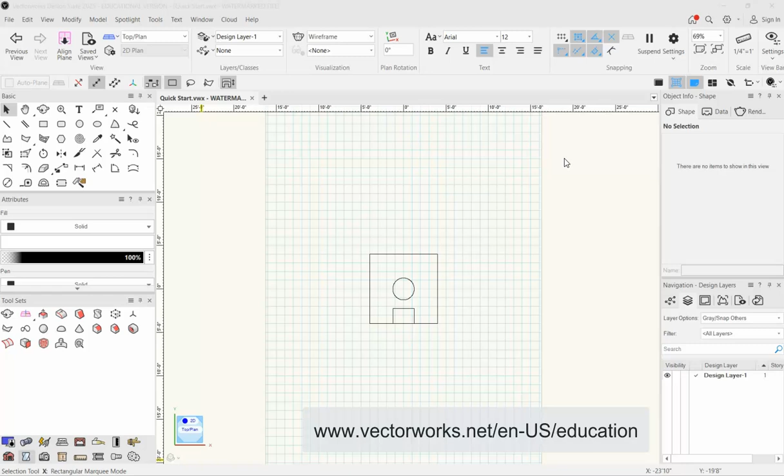Vectorworks is a really wonderful program. If you're a student, if you're an aspiring designer, I highly recommend you go out and get it. They have a free educational license for students at Vectorworks, so go out, give it a try. It's really becoming an industry standard, and it would benefit you to understand this program or to at least have a working knowledge of how to get around in this digital space.

This video today is a little bit drier than some of the others, but hopefully it'll set a good baseline vocabulary for you, and hopefully it's a video that you can come back to whenever you get lost.

Vectorworks has all the tools that you need and then some. It's highly customizable, but sometimes it's hard to know where to look or even what to look for. Probably the quickest way to learn Vectorworks is to jump in and just start making stuff, so we'll want to get to that pretty quickly. While you're watching this, I hope you'll have the program open so you can pause and try stuff, mess things up, and bounce back and forth. So with all that out of the way, here we go.

This is your basic Vectorworks workspace. The layout is pretty similar to a lot of other programs. Across the top here you have your menu. Under File, you have things where you can open files, set document preferences, things like that. Edit has a lot of familiar things such as copy, paste, undo, redo, all the basic stuff you'd expect to find in there.

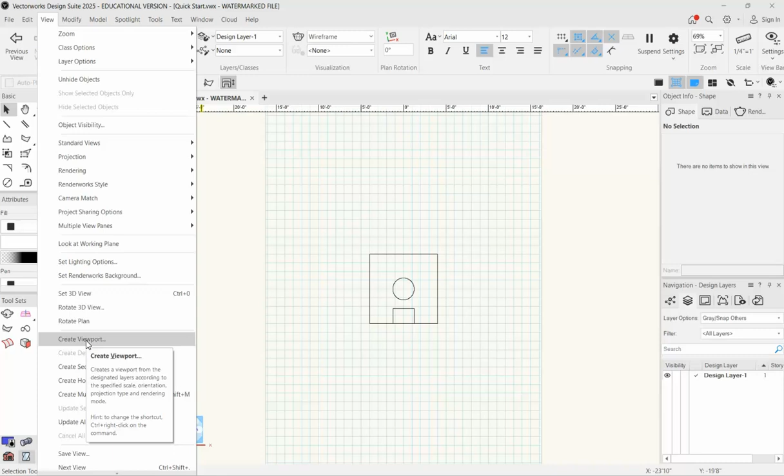View. This is where we start to get a little more specific to Vectorworks. We have a lot of different options in here having to do with rendering, projection, viewports, a lot of really specific stuff. Basically, any way you want to look at your drawings, you'll find options for that here under View.

Modify is the next tab. Modify gives you a lot of options for generally playing with two-dimensional shapes. Model is sort of the counterpart, and that deals a lot more with 3D shapes. So Modify I generally use for 2D manipulation and Model for 3D.

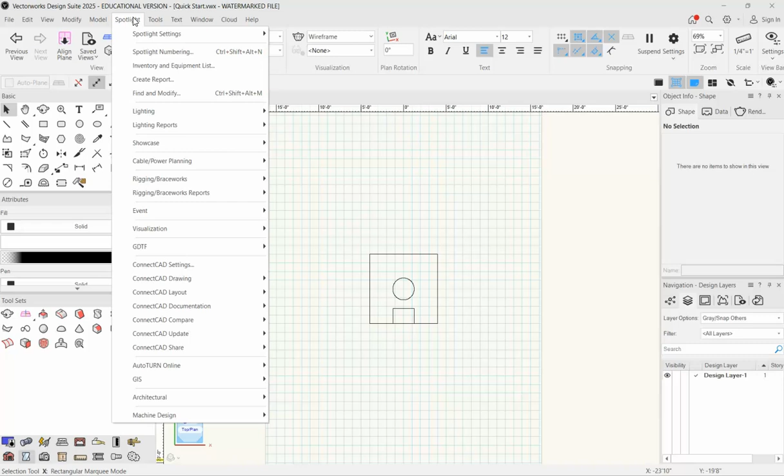Spotlight. This is where we'll get into a lot of the industry, entertainment specific stuff, a lot of the lighting and things like that. If you're a design student, you should have the Spotlight edition of Vectorworks. If not, I will show you how to fix that in just a sec.

So Tools is the next tab. There's not a ton in here that I really deal with, but you can find certain preferences at the bottom, which you may want to come back to.

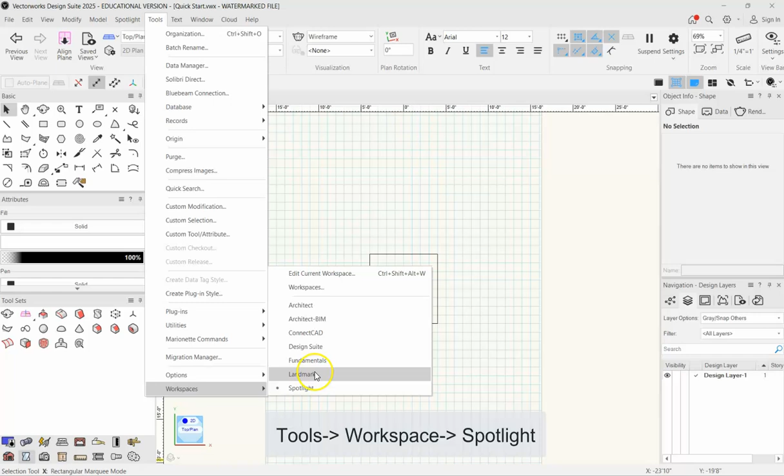So if you don't have Spotlight, like I just mentioned, come on down here to Workspaces. Down here you can pick Architect, Design Suite, Fundamentals, Landmark. You want to be on Spotlight, if we're talking about theatrical design at this point.

Text. You can write things in Vectorworks and you can manipulate that text. You can turn it into three-dimensional shapes and things like that.

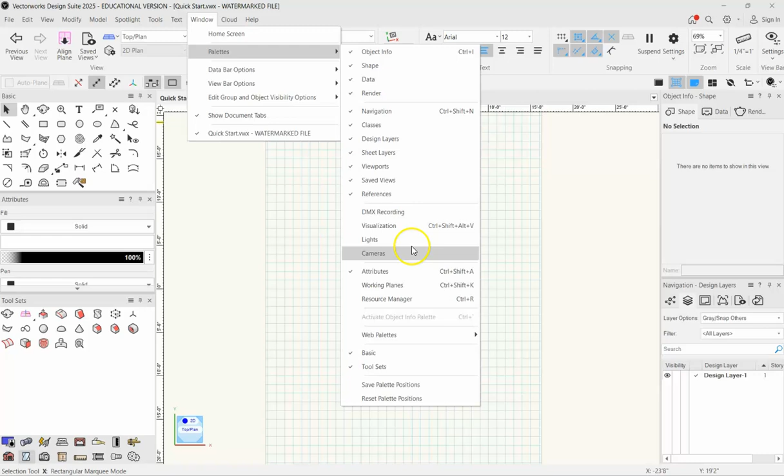We'll go over that. Here in Window, I don't get into this too much other than the one you probably want to know, which is Palettes. Palettes is where you can find all of your different tools and tool sets that you're going to want to be using. If you're seeing something on my screen and it's not on yours, maybe it looks different over here to you, that's probably just a palette setup kind of thing, and that can be addressed over here under Window, Palettes, and then you can select whatever it is that you're not seeing.

In fact, let's take a quick side quest and talk about layout and palettes. As you'll see, we have all these different little palettes that we can undock. We can have them floating. We can pull them over here. We can redock them, whatever it may be.

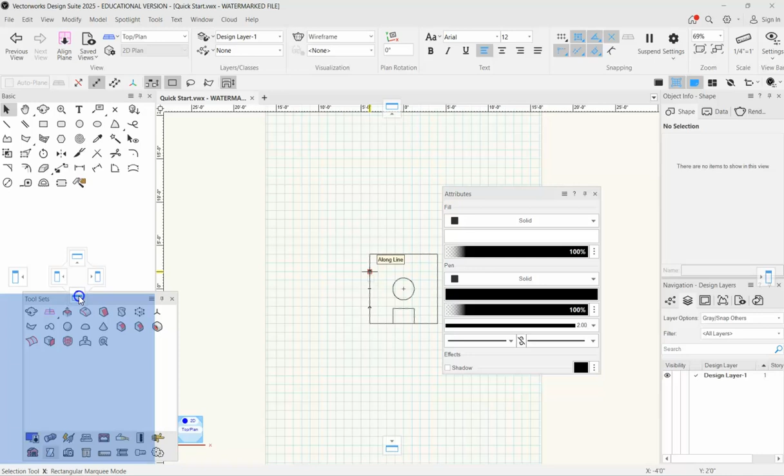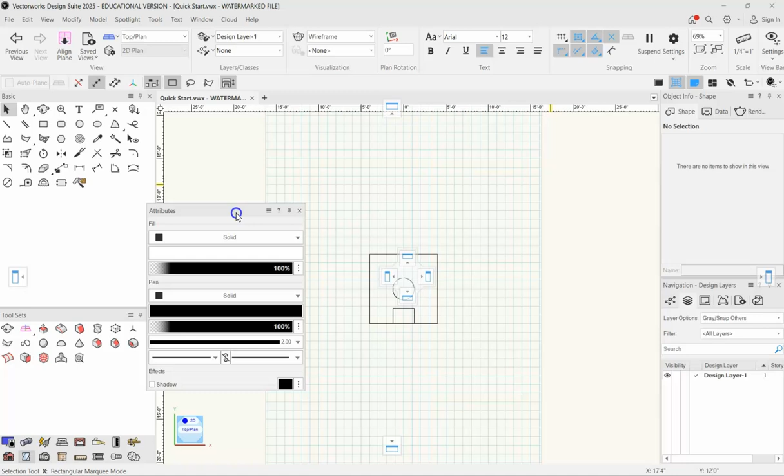Say you accidentally close one out. Now all of a sudden my attributes are gone. How do I get that back? It's as easy as coming up to Window, Palettes, and it was Attributes that I had accidentally closed, so I'll do that. And here we have Attributes right back. I can drag it over here, you'll see it'll bring up this little thing, and I can do that. Same thing too, you can adjust the sizes depending on what works for your workflow.

How much of the tool sets do you think you need to see, and what gives you enough room in the field here to be doing a lot of the work.

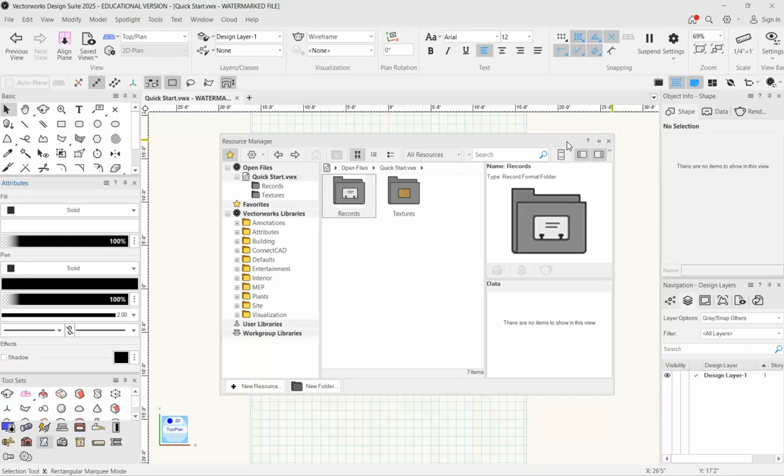When you first start up Vectorworks, you're probably going to see Resource Manager floating somewhere near the top, and every time you hover over it, it pops down and bothers you. At this point, just learning how to use the program, you don't need this, so just close it out. When we do need it, we can come up to Window, Palettes, and turn it back on.

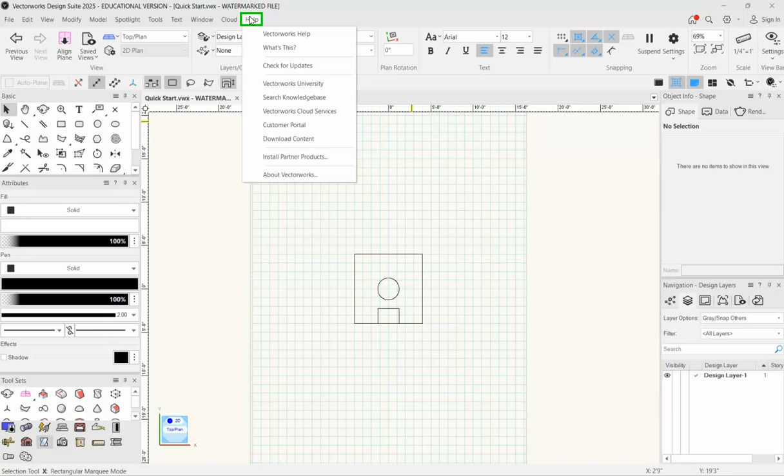So that's Window for you. After that we have Cloud—I'm not going to mess with that too much today. That gets into sharing documents and things like that. And then, of course, Help if you're having issues. They have a nice library, and a lot of videos at Vectorworks University where you can hop on, ask questions, and get some info there. So that is your basic menu across the top.

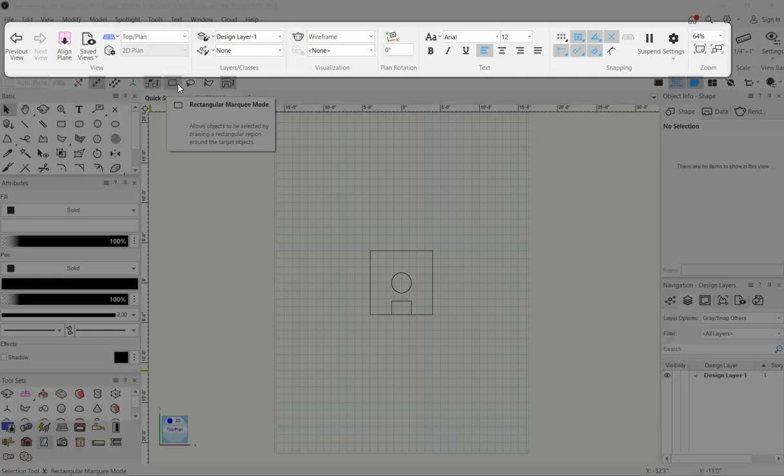Directly below your menu we have our View bar. It has a ton of extra things on it outside of strictly views, but in general this area will tell you how you're looking at the project and what you're working on. Here in the view portion, you'll see different views. Right now we're looking in top plan view, which means we're looking down at this as if it were a piece of paper, but we can switch to something like an isometric view.

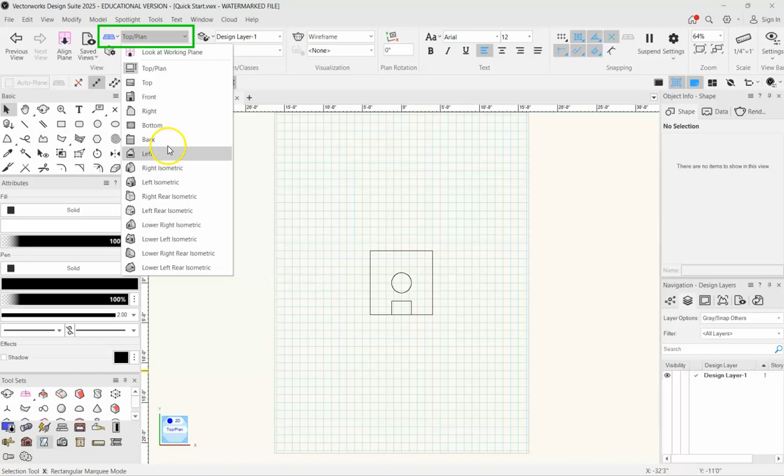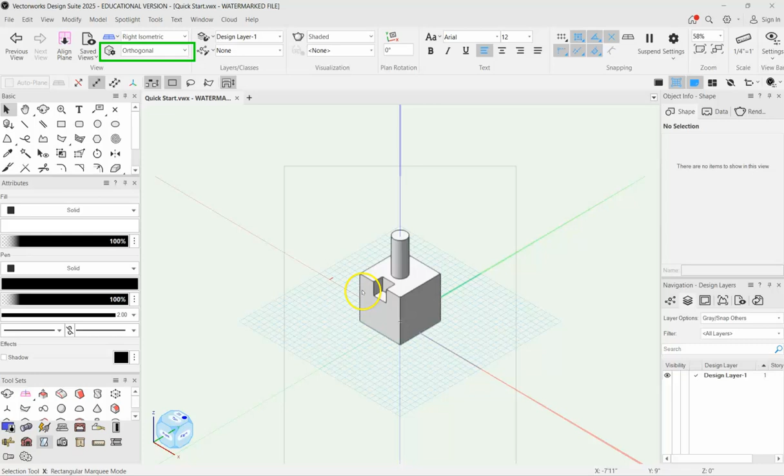And we can flip through our different views right over here. Underneath that, if we are in a 3D view such as an isometric, we have our projection, which can be perspective or orthogonal. So again, this is just a different way to gauge how you're going to be viewing it. They also have a couple different options in there.

So that's view. Right next to that we have layers and classes. Similar to Photoshop or a lot of other programs, we work in layers here so you can stack things up. But in Vectorworks we also work in sheets and classes. There's another video in this series that deals exclusively with classes and layers and all that stuff, but for now you just need to know that this is an area where you can select which class you are creating and what layer you are drawing it on.

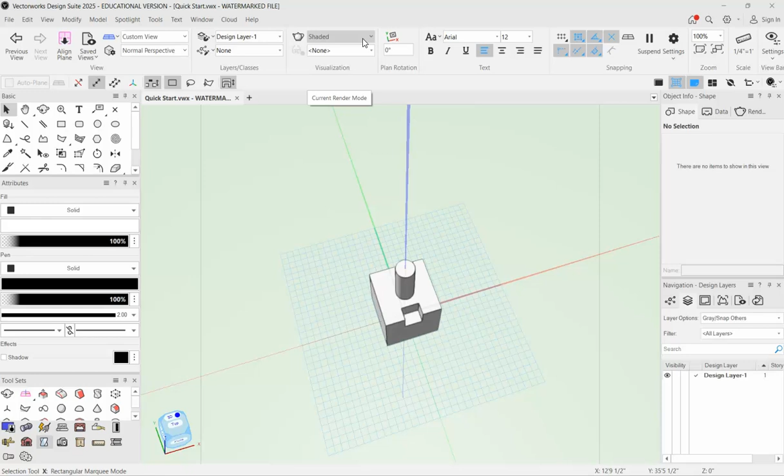Next to that we have visualization. So again, visualization is just how we are rendering our images as we are drafting. Right now it's in shaded—that's sort of the default, and that's where I do pretty much all of my design. You can get to fancier renderings and things like that once you get to actually working with images and viewports and putting together your final package. But for drafting, I usually keep it in shaded.

But you can play through some of these. There's Sketch, there's Artistic Renderworks, which you can make look like pen or pencil or whatever it may be. But by and large, I usually work in shaded. It used to be called OpenGL—if you have an old version of Vectorworks, this is OpenGL.

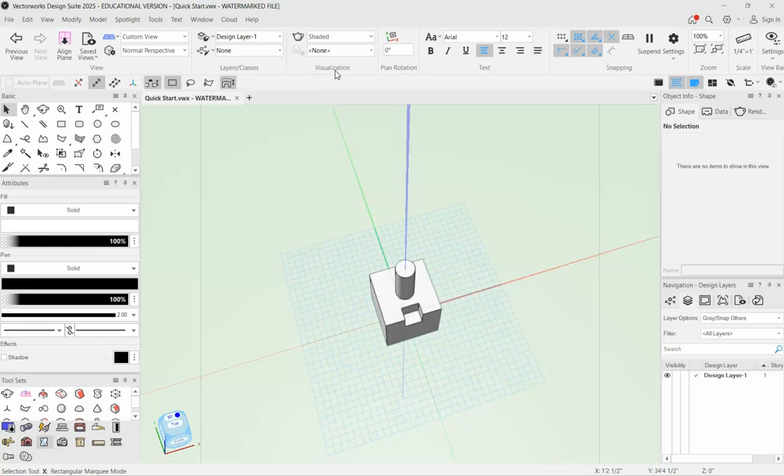Next to that, I'm going to skip plan rotation. But next to that we also have our text editor. Similar to Microsoft Word or Google Docs, you can punch up text in here using your text tool, and you can edit it—change the size, the font, etc.

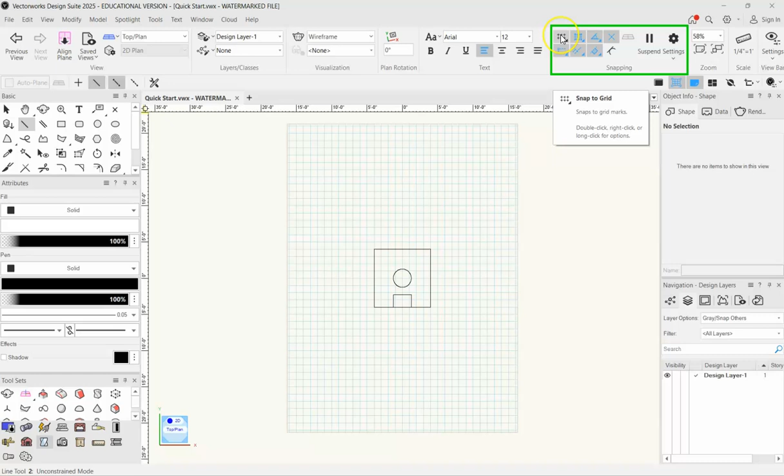And now we have snapping. Snapping is great, it will really help you with precise drawings. What that essentially does is it allows you to choose what you want to snap to—do you want to snap to a point on this grid, snap to an object, or to a specific angle? So as I am drawing something, I want it to be perfectly straight, and you'll see it will snap to that line and draw it completely horizontal.

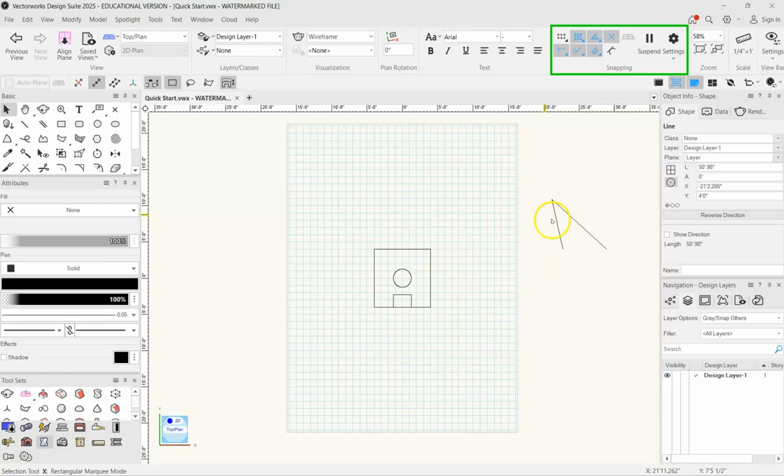It'll also snap up to 30 degrees, 45 degrees—it'll make things really precise. It'll also snap to endpoints so that you're connecting things perfectly in space. That snapping, if it ever gets in your way, it's easy just to pause it or turn it off right up here.

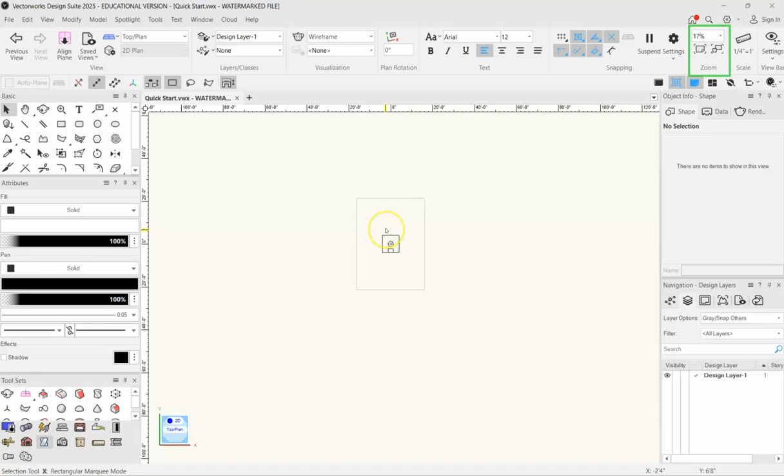Next to that we have Zoom. I don't actually use Zoom a lot—I prefer to use a mouse. If you don't have a mouse, I really suggest you get one for use with Vectorworks; it just makes life a lot easier. With your scroll wheel, you can zoom in and out really easily. Control plus your scroll wheel will move you up and down. Shift with your scroll wheel will move you left and right. So I try to avoid this too much, and I just use my mouse generally to zip around.

Anyway, there's also some stuff below that. This is your quick preferences area. You can play with different settings, but again, I don't want to get too deep in the weeds today as to what all of this various stuff does.

As you start working with Vectorworks, you'll know a little bit more about your own workflow and style and what does or doesn't suit your work. So I wouldn't worry about this too much.

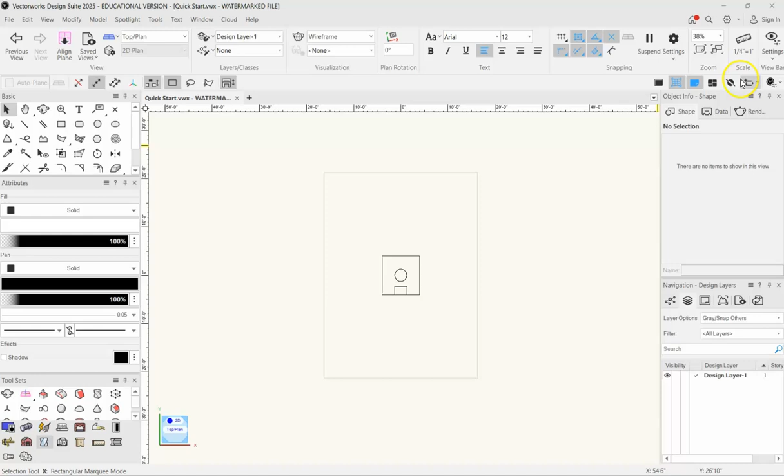But again, if you're seeing something on my screen that you're not seeing, a lot of that can be looked at up here in quick preferences. So you can turn the grid on or off. You can make the page boundaries there. You can go into dark mode. Whatever it may be, all of those little preferences are going to be over here.

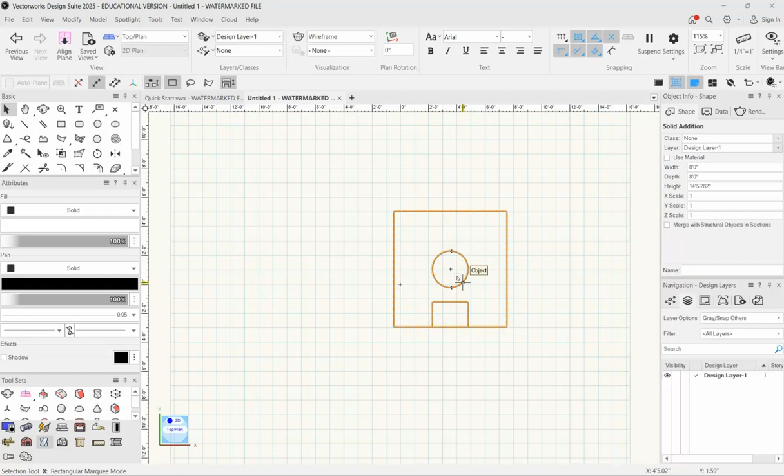Below that, you will see tabs, so you can have multiple files open, and you can flip from one file to another, and you can copy things from one file to another. And that's about it for the view bar up here.

Okay, so let's get into some of the fun stuff now. Tools. Over here on the left, you will see your basic tool palette. I'm not going to get into all the different tools. In video 3, we'll start getting into some of this and actually start drawing stuff. Just know that up here you have all your different tools.

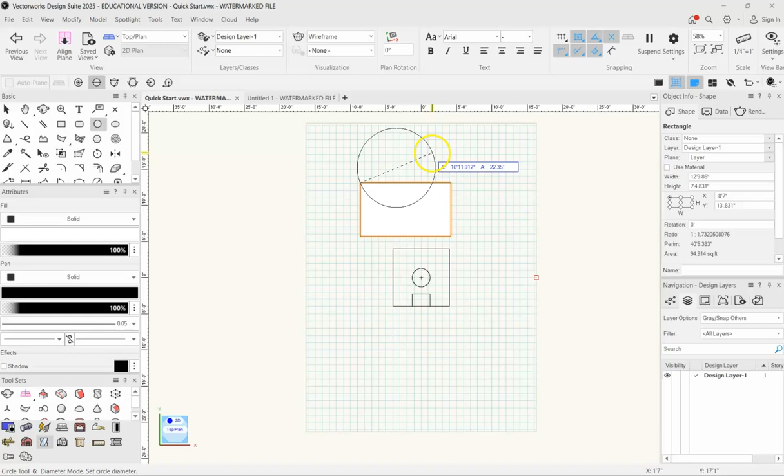For example, we have our rectangle tool. With 2 clicks, you can create a rectangle. You set one point, pull it out, set another point. Same thing, we have a circle. You can pull it out this way, and draw your circles.

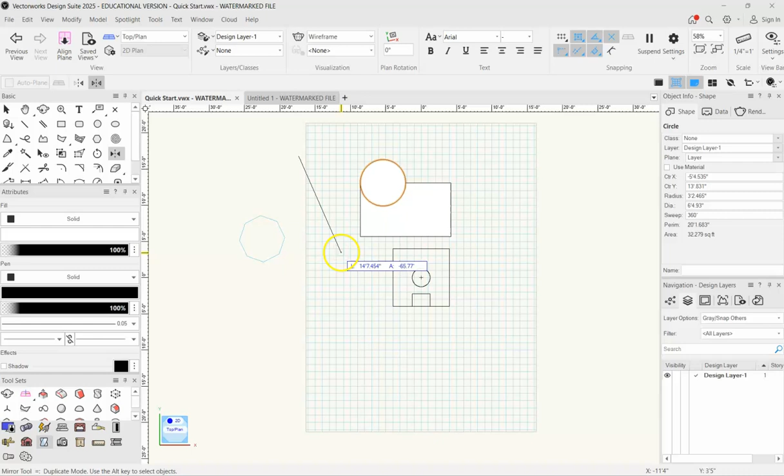Also, too, I think it's important to note that not all of these tools are simply for making shapes, but they're also for manipulating shapes. For example, we have like a mirror tool. So if you have something selected, you can go ahead and strike a line, and it will mirror that object and duplicate it.

The selection tool, right here, this little arrow, that's probably the most important one because you need to be able to select things. You can select objects with this. The tools that you're going to be using a lot, such as selection tool, I think it's worth learning the hotkeys for.

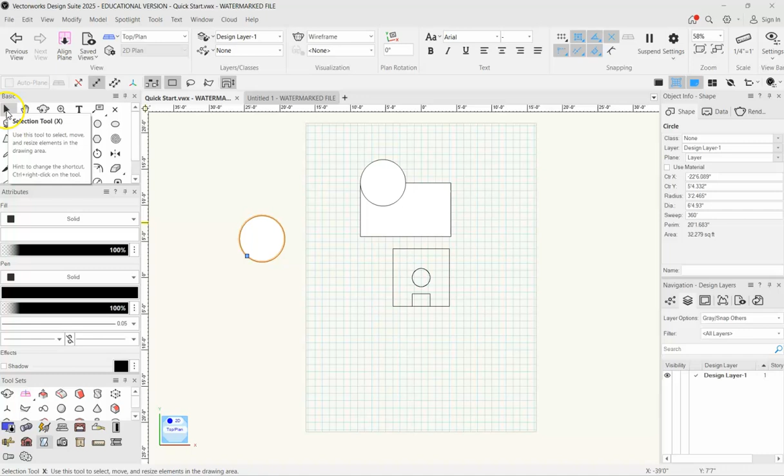As you hover over any of these tools, it'll bring up a little description of what that does, and it will also give you a hotkey. You'll see on the selection tool that is X. So say I'm in here drawing rectangles. If you want to jump real quickly, instead of bouncing all the way back over here and selecting it, as you're drawing, you can simply hit X. And now I'm in my selection tool, and I can jump right into modifying this.

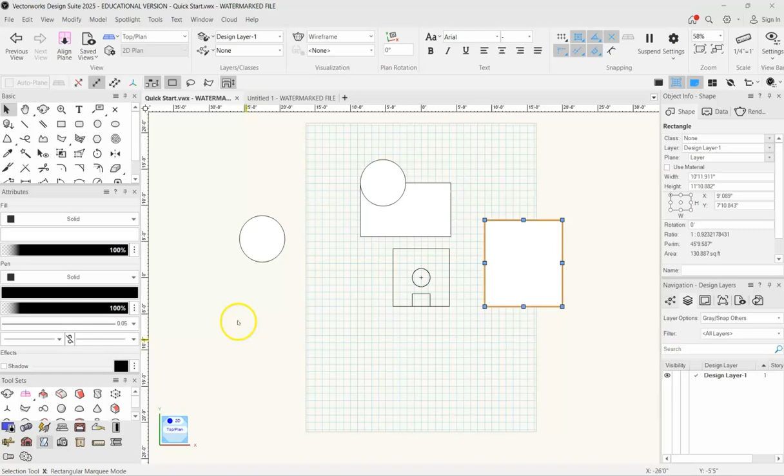I think it's also important to note that when you bring up pretty much any tool, your toolbar up here is going to show different modes. That means you can use this tool in various different ways.

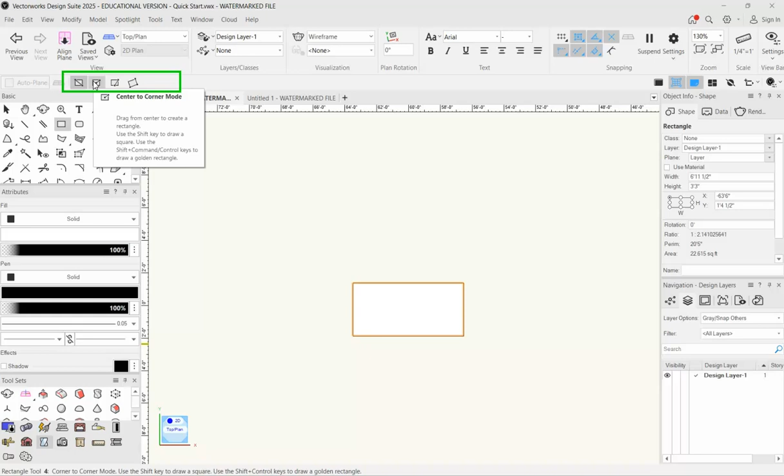So, for example, let's look at our rectangle again. Let's say I have the rectangle selected. I want to draw just like that, 2 points. So if you look up here, here are the different ways we can draw rectangles: corner to corner, center to corner, midpoint to corner, or 3-point. So with 3 points selected, I draw 1, 2, and then I can strike it up this way.

So pretty much every tool you have is going to have different modes. Again, with circle, you can strike it by the diameter. You can start with the center point and then define the radius. There are a ton of different ways to do that, but all of these tools are going to have different modes and things you can do.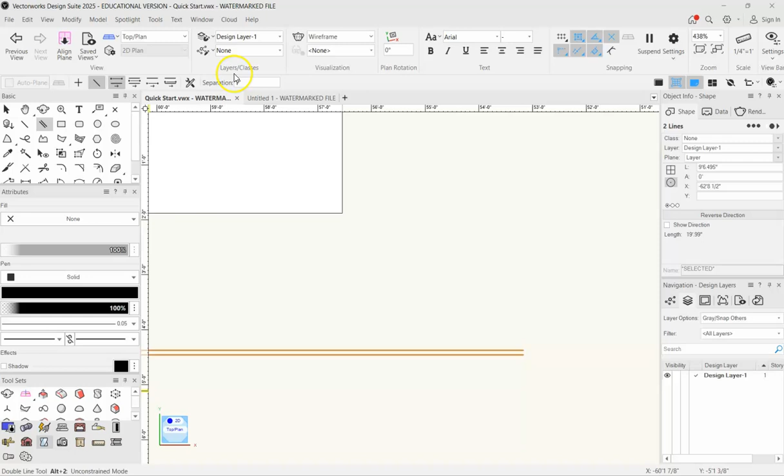Double line tool will draw 2 lines for you, like that, in parallel. But you can change how far the distance is between them. Say you want that to be 2 foot. And then the next one you draw is going to be much wider. So this is an important thing to play with. If a tool's not behaving the way you'd like it to, you can usually come up here and change the mode or play with the settings.

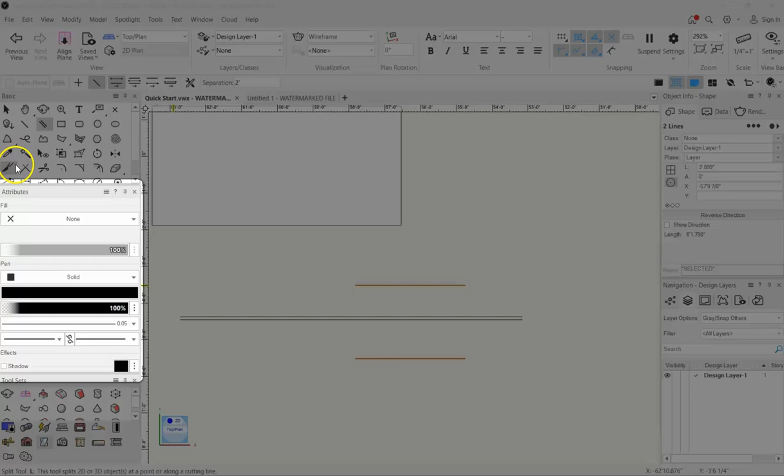Moving below that, under our basic tool set, we can start to take a look at attributes. Let me clean some of this up real quick. Selection tool. Select and delete. You can also hold Shift as you are selecting, and that will select multiple things.

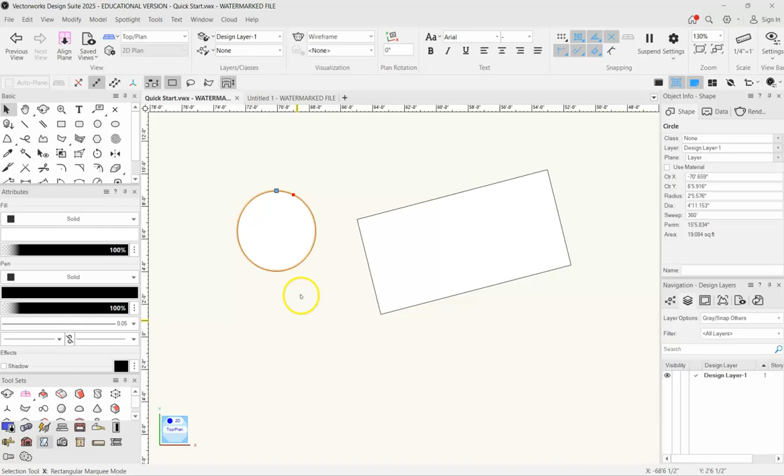Then just tap delete. So attributes. Every shape that we draw has different attributes. For example, this has a black line around a white fill. You can easily modify and make your drawings pretty specific. It gets even fancier once you get into three-dimensional modeling with textures and things like that. But this is where you can modify all of those things. So once you have something selected, you can change it.

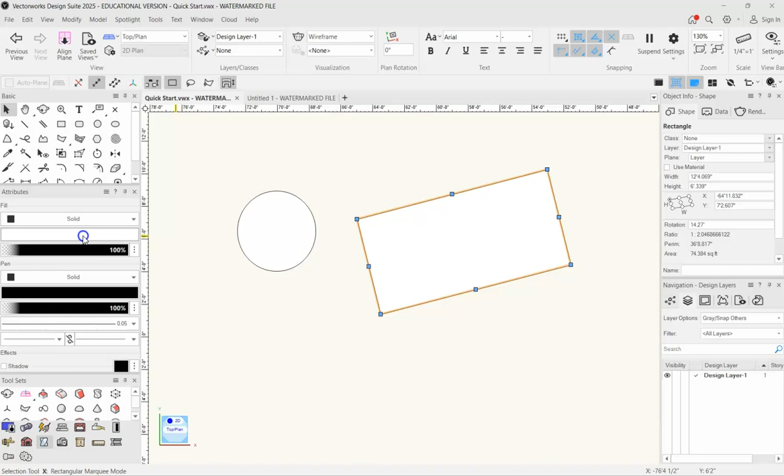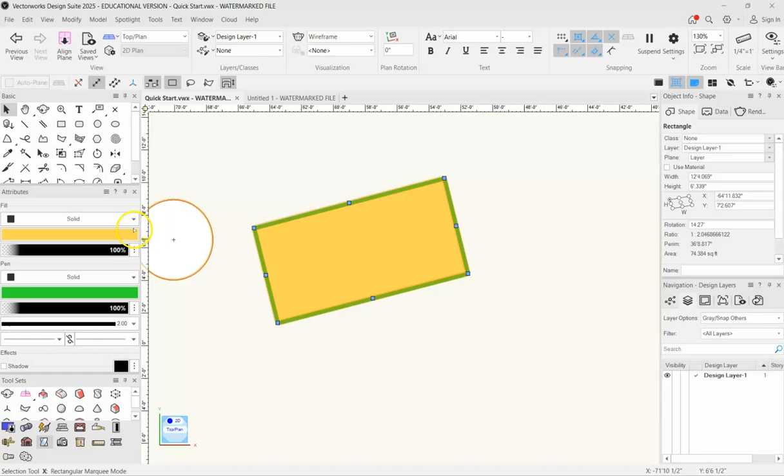Right now it's solid, but we want to change the color to orange. And the pen, the outline here, instead of being black, we want it to be a really thick green color, let's say. So we can change the color there, and we can change the line thickness as well. So you can modify things over here in the attributes. You can do dashed lines, you can do hatches, you can do gradients. All that different stuff can be found over here.

Moving below attributes, we'll see here that we have other tool sets. And you can change how much of this you are or are not seeing by dragging.

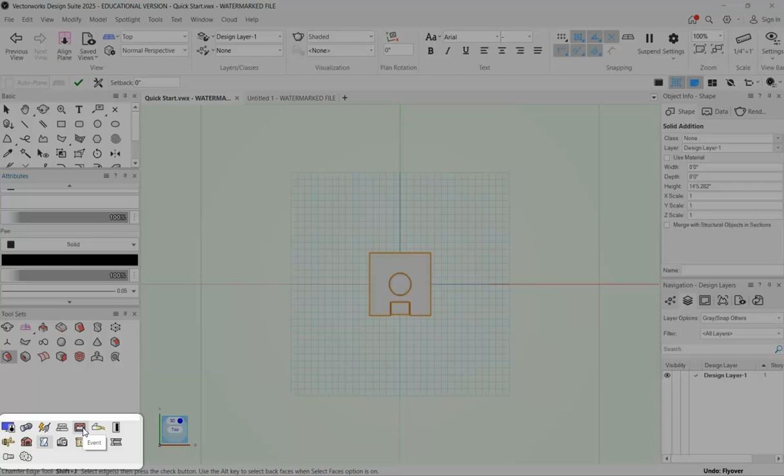Down here, these are all different tool sets. This one, for example, is event design, with things like curtains and stairs. You'll use this a lot for soft goods. We also have spotlight, so you can add lighting instruments, trusses, rigging. The one you'll use a lot is probably this 3D modeling one, where you can get in and start to manipulate other 3D objects.

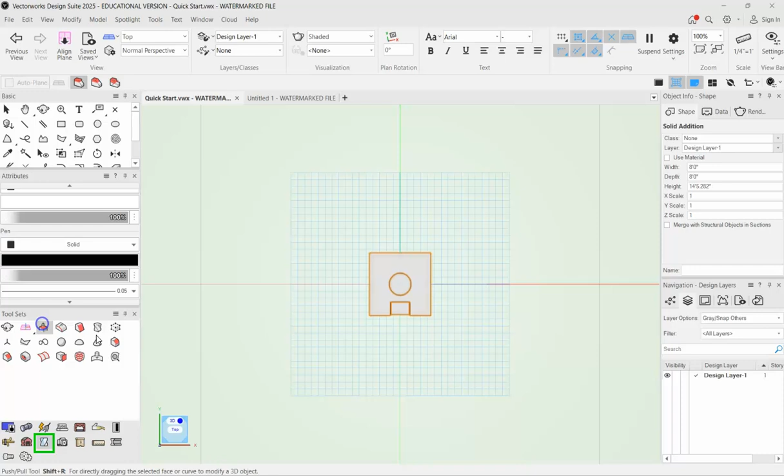For example, this push-pull tool. I love that, you can pull things in and out, shrink things down. Ctrl+Z to undo, or you can undo up here as well. This has a lot of really cool tools to get in and start playing with. We don't use these quite as often, but once we get into 3D modeling, you'll be in this one

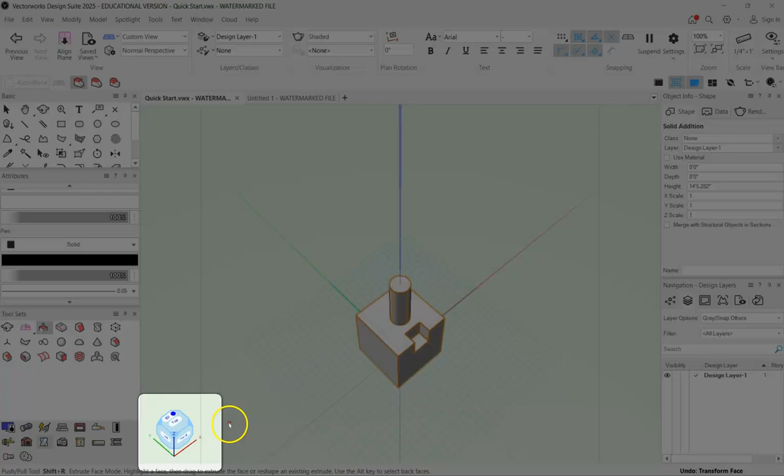probably quite a bit. This is new in 2025, called the on-screen view control. What this allows us to do is, if you're in any view, it shows you basically how you're looking at this. You can grab this block, and as you start twisting it, it will twist your world, your drawing, accordingly.

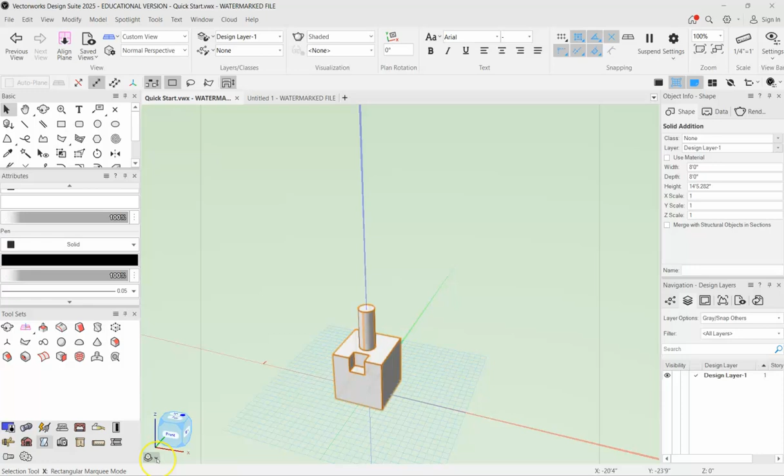So it's kind of a fun way to get in and move through the work. I've gotten pretty accustomed to using just my mouse and my flyover tool, so I don't need this a lot. You can turn that off if it's getting in your way. Right here, when you hover down, it'll appear, and you can just uncheck that. If you want to bring it back, hover down around here, and this should pop up. It's kind of ghosted, and you can turn that on.

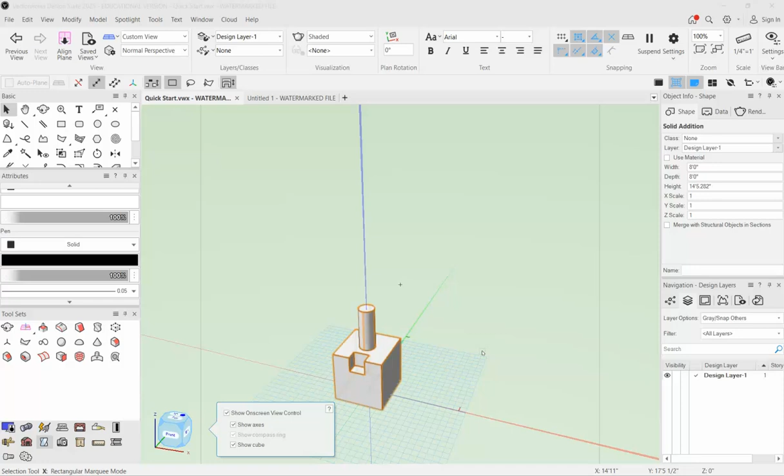Moving across to the right-hand side of the page, over here is our object info palette. Every object that we draw has attributes, and there is information about those objects over here in the object info. For example, this rectangle I just drew, once it's selected, you'll know it's selected by the orange around it. You can come over here and it'll tell you the width and the height of this object, the area, the perimeter, things like that. You can actually also change objects from over here.

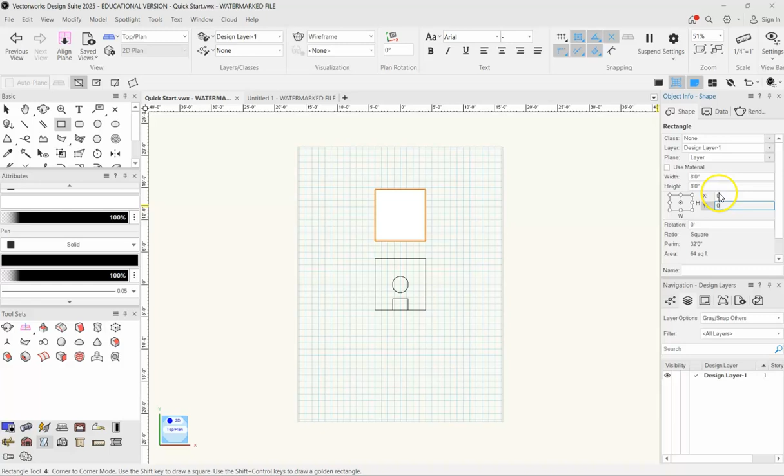So instead of 12 foot by 6 foot 11, I want this to be 8 foot by 8 foot square. I can just type it in there, and our object takes on those attributes. It can also tell you where it is on the page. Currently, it is set to these coordinates on the page. So if we want to center it at 0, 0 on our page, we can simply type in 0, 0,

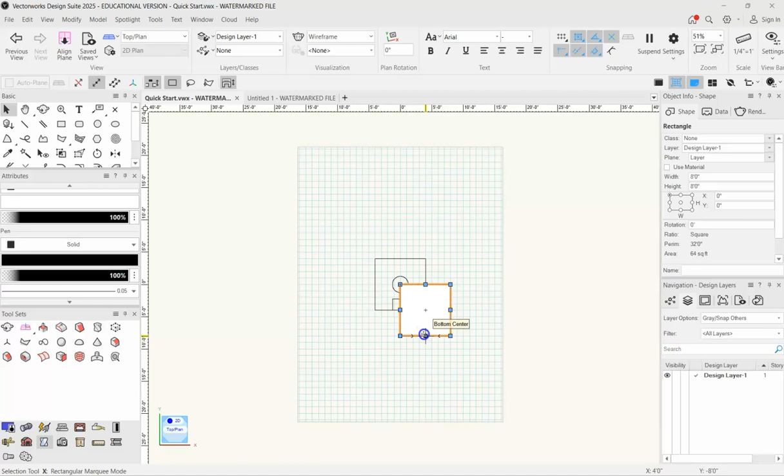and now it is centered on the page. If you want to set another corner to 0, 0, you just select that corner, 0, 0, and that corner is now dead in the center of the page. So that's object info. You'll see up here too, there's other different tabs. We'll get to some of this for rendering and data, but for right now, mostly we're concerned about shape. That's really the one thing you need to know.

Moving below our object info, we have our navigation pane. This is where you can flip through between classes and layers and sheets. There's a lot to go into here, and that's a really big subject, but for now, just know that this is where your navigation pane is.

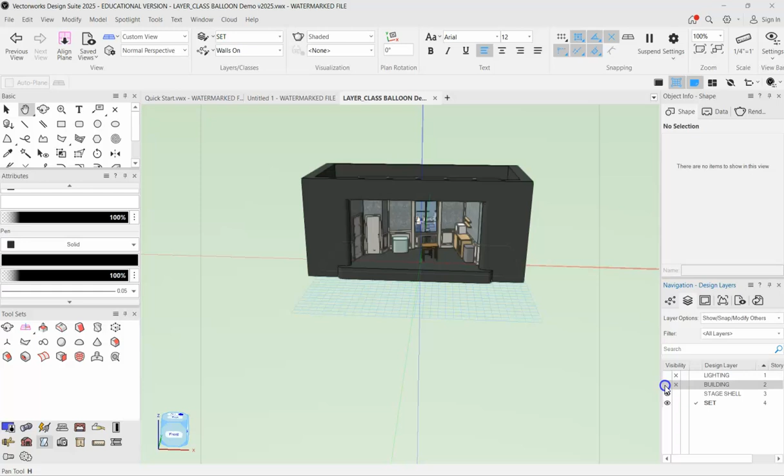Once you get into some other types of files, here's another demo, you'll see that you can separate things by large groups. For example, I can turn the building off, turn off the stage shell and just see the set, turn off lighting, or turn these all back on. So that's kind of how layers work. Classes, similarly, I can go ahead and turn off my trim work if I want to just see certain walls, things like that. So that's classes and layers.

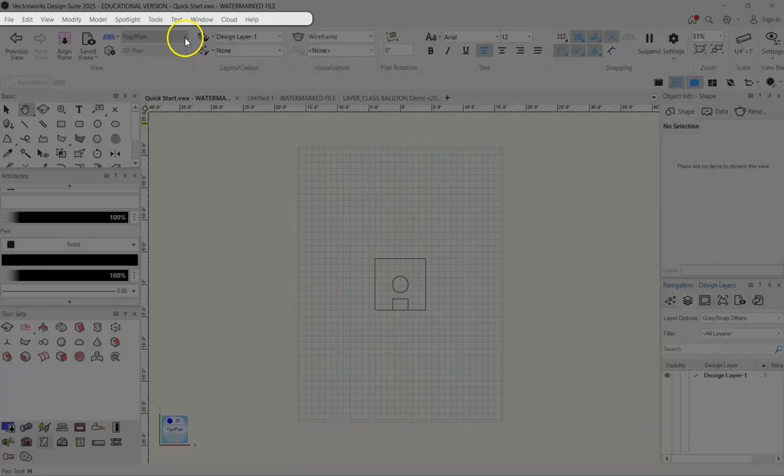All you need to know at this point is that this is where it's located. And that's about it for the workspace. Just as a quick review, remember up here you have your main menu. This is where you open files and you can do a lot of your 2D and 3D manipulation in here.

Below that we have our view bar. Below that on the left we have our basic tool set. This is where all of your most important beginning tools are going to be located, so selection tool, that's going to be a big one. That's all up in here. Attributes directly below that, understanding that all the shapes have attributes and you can define those.

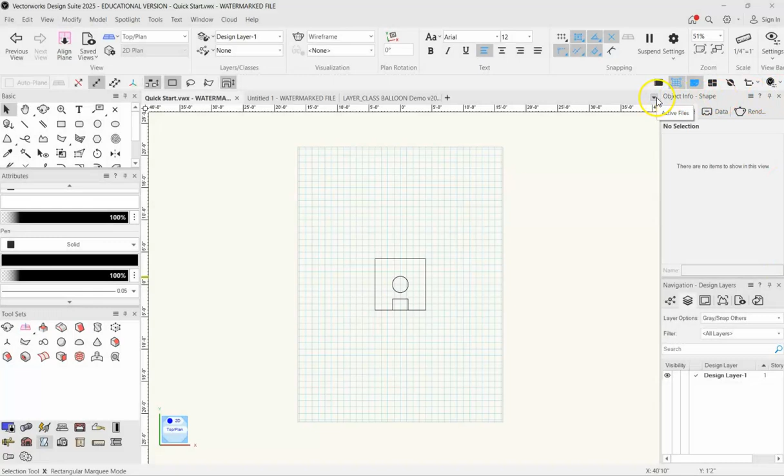Tool sets underneath that, so you have in here was where you find all the fun 3D stuff, different kinds of fasteners, really small technical gizmos, curtains, things like that. On the top right, again, object info, where you can find out anything and everything. And then below that we have navigation, where you can bounce between classes, sheets, layers, saved views, all that kind of stuff.